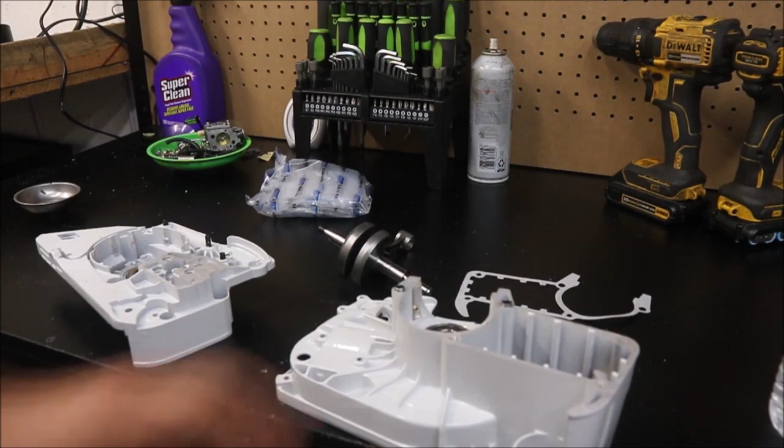Alrighty guys, got the cases laid out. Case gasket. What's funny, that case gasket was by itself in the bottom of the box that the cases were in. Damn near ripped the thing getting it out. I've not seen a muffler gasket or a base gasket anywhere. I'm not real concerned about the base gasket, but hope we got a muffler gasket somewhere.

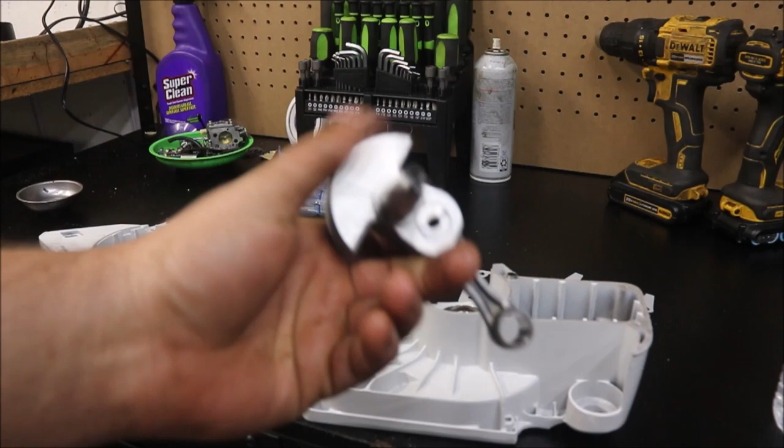But what I wanted to show is the Farmertec cranks have come a long way over the years. I put some of the very first kits they came out with together, going on like 8 years ago or something. They may have been making them before that, I don't know, but I done a 372 kit, and then a year or two later I done a 250 kit. They were both horrible. The quality just was not there yet.

But I'm not gonna bore you guys with the assembly of the cases. There's lots of videos of me assembling cases. If you're a beginner, get yourself a toaster oven. Everybody has a freezer. Or you can use a heat gun. I have a heat gun here. Heat your cases up, freeze your crankshaft, and 9 times out of 10 they'll drop right together, or you can buy pullers and pull it all together.

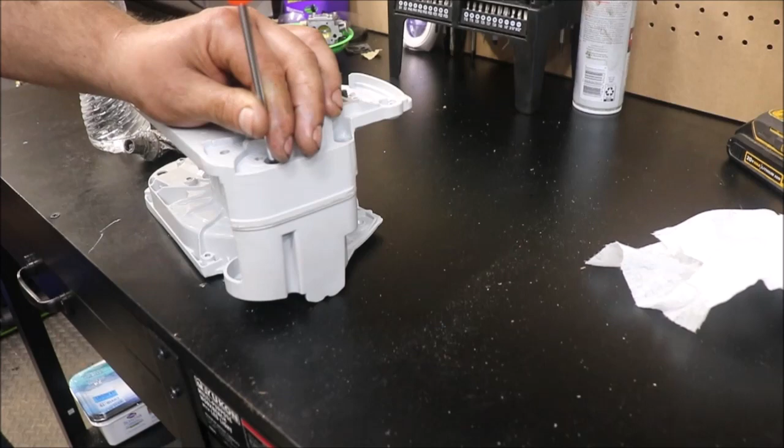And these newer Farmertec bolts are like the Stihl OE bolts. The back side of them has the pattern that works like using a lock washer. Pretty cool.

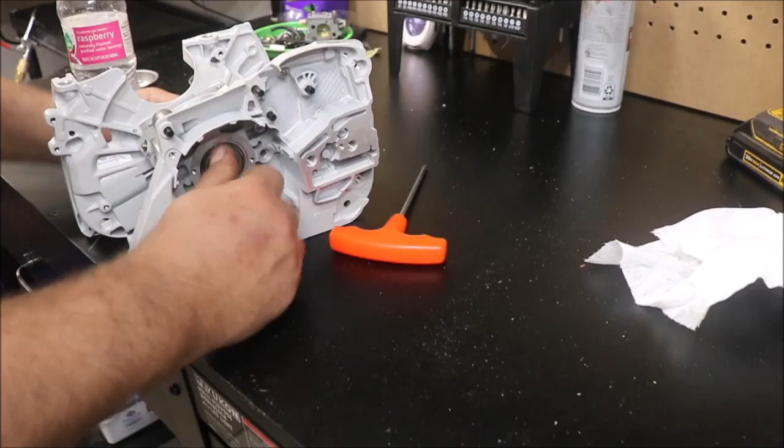Okay, so that's actually spinning really well, and it looks to be lined up really well. You have to remember the crank seals are already in here, so you're not going to get it to just zip around, but there's a little bit of grease out here on the end of that, and I'm able to spin it around. I'm not even going to whack on that one with the hammer. If it's out any little bit, it'll level out as the saw gets warmed up.

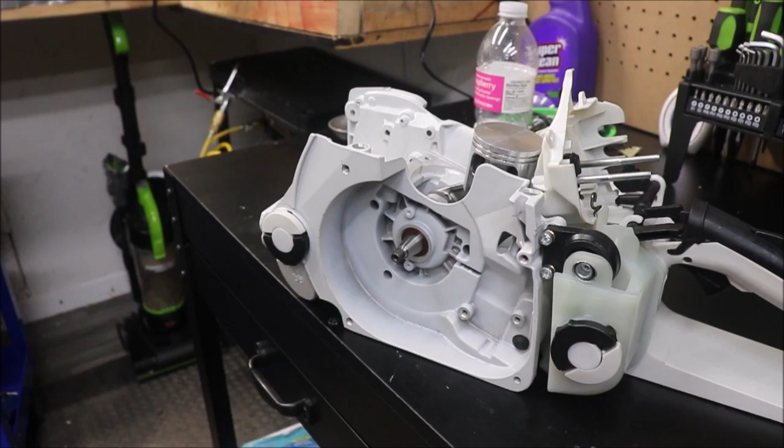But okay guys, first off we've got what appears to be a flat top piston. It is a windowed piston, but what I'm finding odd, which the 200Ts are the same way, and I don't really care for that, this is plainly a case fed setup. Quad port. Squish band in it looks horrible. It's got a big step all around it, and then it steps down. It's like domed, and it just looks horrible. That's going to need more than just a little cleanup.

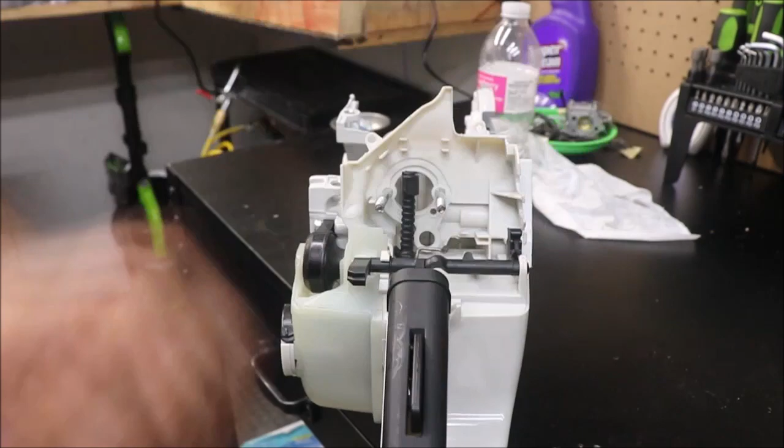The rest of the cylinder's not too bad. Looks to be one of their cheaper line of cylinders. I think my 460 had this same cylinder, like it came from the same manufacturer. But what was weird, the wiring was not with this handle. It was in the box with the coil. I'm gonna have to figure that out. I'm probably gonna have to look at an IPL, honestly, because I don't have another one of these here to look at. But the handle wasn't too bad.

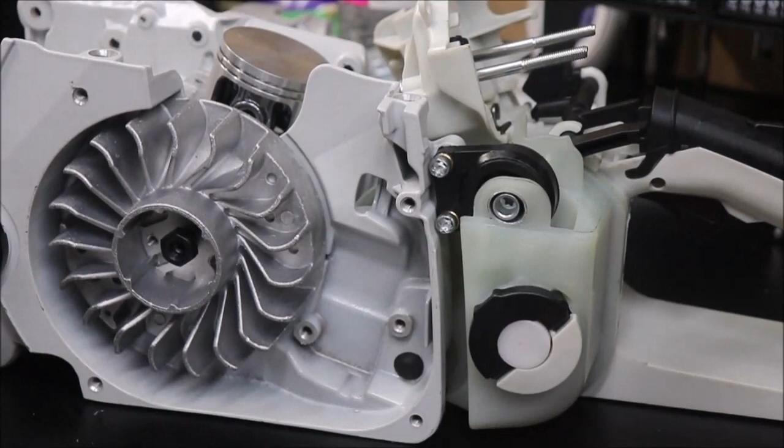There were some bushings that had to be pulled into the cases. It does have a rubber AV mount back here, and of course your springs at the front, and it's got a big spring that's going to go from the handlebar, I'm assuming, over to the cylinder. I've not looked at that. Maybe not. I don't know. We'll figure that out when it comes time for it. But alrighty, guys. This one has enough slop in it to go ahead and get a timing advance, as you can see.

Alright. Now, I'm going to get the cylinder on and see where everything's initially at. Again, that squish band looks like pure garbage. Okay guys, so I'm going to show you every damn little hiccup with this one I can find. First off, I'm kind of aggravated about the wiring not being in the handle, but we can figure that out. It almost looks like there's something missing that I don't have in the kit, but

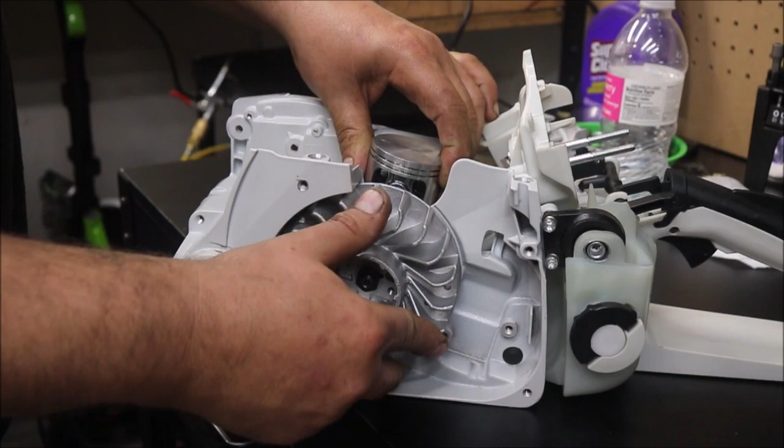I'm about 100% certain that's the crankshaft lobes hitting the inside of the piston or bottom of the piston, because that thing spun smooth as butter before I put the piston on. Let's just see here. This is a 12mm wrist pin setup. Yeah. Smooth as silk.

I honestly think we might be hitting the cases in here too with the crankshaft. Well, maybe when we put the cylinder on it won't be the case, but again, I just want to show you guys every little hiccup. A lot of people buy these kits and then throw a bunch of OEM stuff at it. And I'm just going to tell you, by the time you do that, you probably could have found one of these damn things used somewhere.

I build these a lot of the times just to play with. You can get a good saw out of them, but I have put them together to where there wasn't a hiccup at all, nothing missing at all, but I have done several of them where there were parts missing, wrong parts, or just, it is what it is. It's not an OEM saw and never will be.

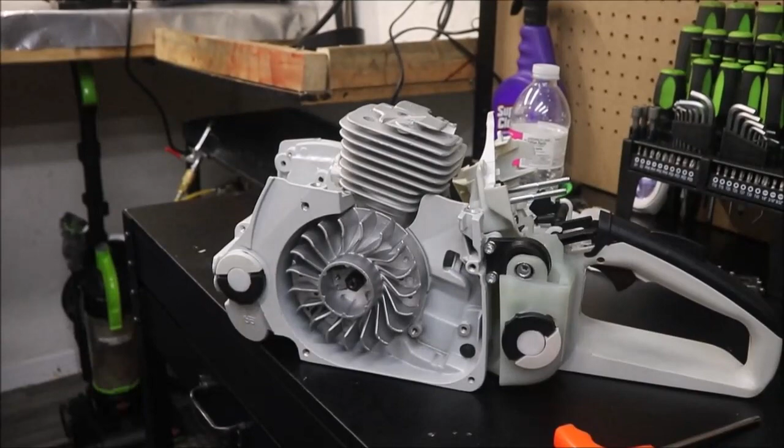This is starting to bind. I've not even put a screw in this. I want to show you guys something. That's at BDC. We'll have to figure that one out. Once I figure out exactly what in the hell's got it, we'll bring you guys back and let you know. Could be as simple as just a case gasket or something, but I highly doubt it.

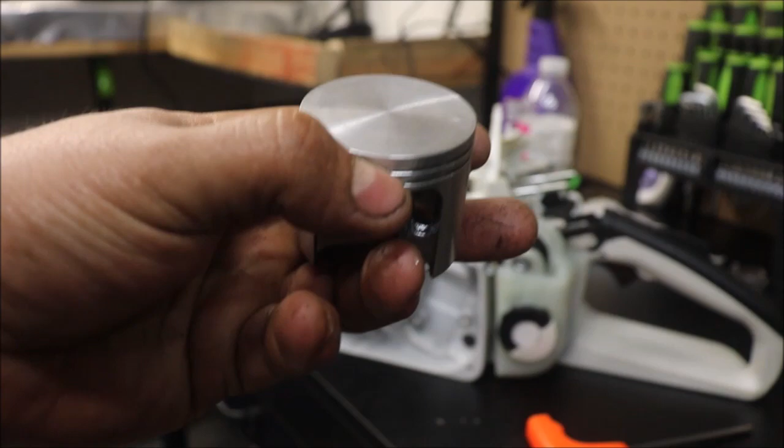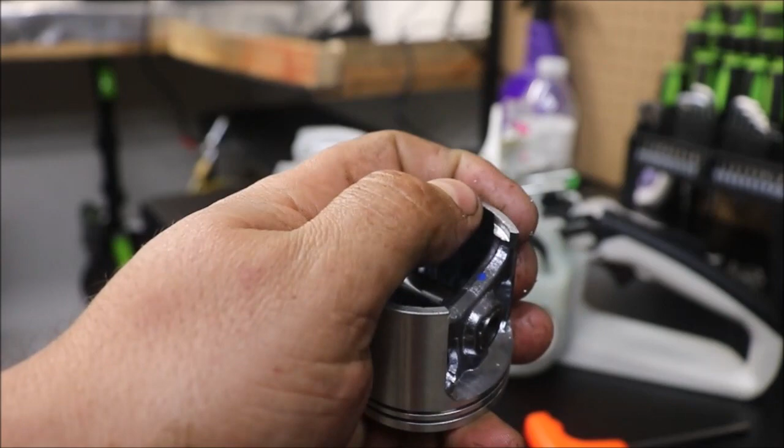I thought that was a flat top at first glance. That thing has the ever most slightly hint of a dome in the center. That's kind of weird, but it is a good looking piston. But I swear I believe we're hitting those supports right here inside. It could even be hitting the skirts. All of it's kind of rough casted, but right here it almost feels like it's been scrubbing and almost looks to be that way. I'm going to go over and clean this up with the die grinder. I guess we're modding the piston first on this one.

So I took just a few minutes with the Dremel and, hitting. Hitting pretty good, really. When I first set the cylinder on, it wasn't that bad, but right there, not half bad. If I had the bolts in it, it probably wouldn't be scuffing as bad, but sure enough the bottom of the piston's hitting the crankshaft. That's kind of really shitty there, but anyway, I'm probably gonna quit on this thing for tonight, I guess. Getting a little late, but I'll add more to this as I get more.

Alrighty guys, success, I think. I ground a lot out of the inside of that piston. That's kind of insane. But again, I wanted to show you guys every little hiccup. I've shown putting some of these together. A lot of them do go together, you know, without many issues, but I honestly think this one's going to end up being a problem solve. I could be wrong, but you do run into them every now and then. But like I said, I think I'm done here tonight.

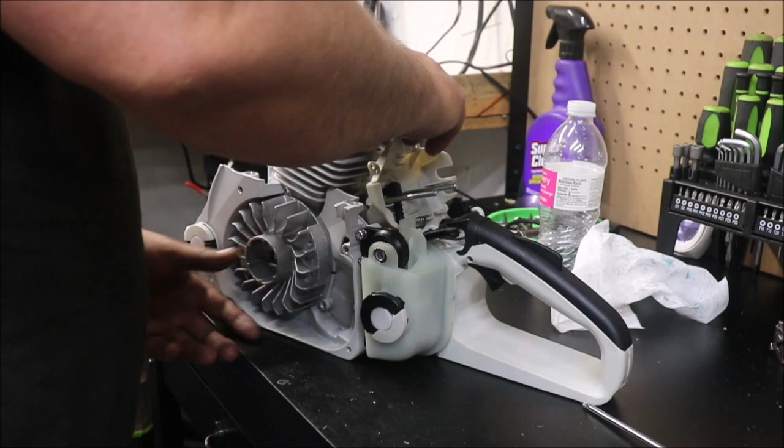The only thing I may do is see if it'll even squish a piece of solder. Let's go with their medium size stuff. Alrighty, we got our solder. This is the medium stuff. I'm just wanting to get an idea and see what's up here with this thing. I've not got high hopes for this top end. Well, it really ain't that bad. That's pretty good mesh on it. Let me get my calipers set up and I'll bring you guys back and let you know what I find.

Alright guys, got 24 thou squish. The next thing I'll probably do, and it will be tomorrow afternoon, but again, I'm going to put this whole video together.

It'll be long. Some people like sitting and watching a long video. I know a lot of people have these builds. I do myself in multi-part series, but I'm just not going to do it. I'm just going to show you everything I do here and any hiccup I run into in one long video.

But 24 thou squish, but I'm going to check and make sure we can even cut that band. I didn't even look to see if there was a death ring. It's late. It's going on midnight. We'll look at all that tomorrow. I'll check our intake timing, see how easy that band cuts, and you know, if we can cut it at all. It'll suck if we can't, but I can make power with it regardless.

We can maybe cut a pop up or something if we have to get a little more pop out of it, but 24 thou, the next thing I'll do is check intake timing and see if we can cut a bunch of material out of that band. But anyway guys, we'll update.

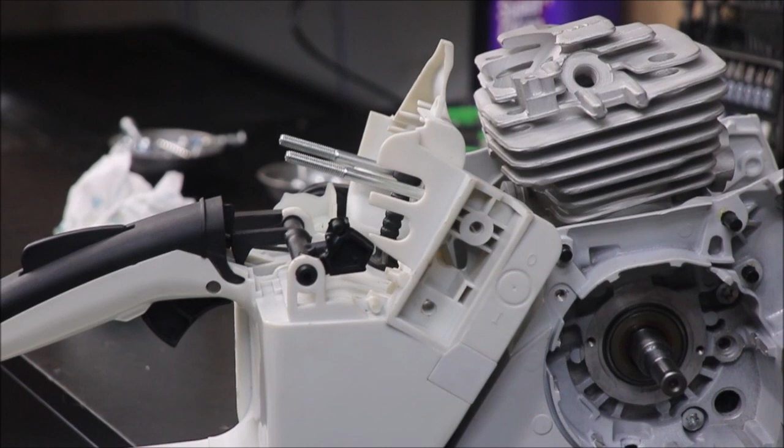Well, thank you Farmertec. After a little bit of homework, we do indeed have a contact spring missing. Yeah, like I said, every other one of these kits you get, there'll be something missing from it. It's just kind of odd that spring. I've searched everywhere, went back through the box, all the bags, even the trash can where I threw the bag away that it came out of.

But after getting so many of these kits and putting them together over the years, some of them I've not even shown here on the channel, it seems like you'll get one every now and then that's got one or two little pieces missing, but I think that thing's like $6-7, so I guess we'll get one ordered and get it on the way. But I think I'm going to go ahead and get into the cylinder work and port work on this thing and see if we can figure some of that mess out.

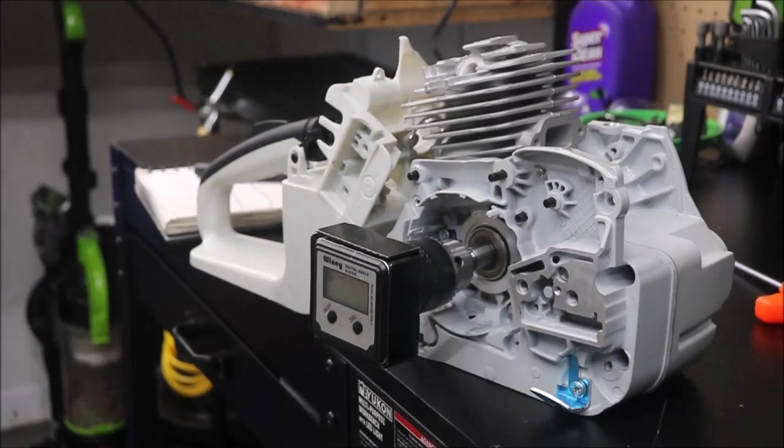Alright guys, pulled the port map on it. We'd done the squish last night, 24 thou, but of course, I showed that combustion chamber and band. It's just one big mess. 105 on the exhaust roof, 129 on the uppers. That seems to be all around from what I checked. Usually you'll have one open before the other, but that was all around on this particular cylinder, and 68 on the intake, which some of that's scared.

I've got it clearanced, but the piston needs put in the lathe, I guess, backwards, and some of the skirt trimmed off anyway. It's clearing the journals on the crankshaft, not lobes, but it can't be by a lot. But anyway, I'll yank this mess off of it and see what we can come up with, if we can even do any machine work. If not, I'm sure we can make it run good with what's there.

From what I've seen, the G3666 or whatever it is, or G366, the blue saw, from what I've seen in other videos, those things make really good power right out of the gate in stock form with minor mods. So we'll just have to see.

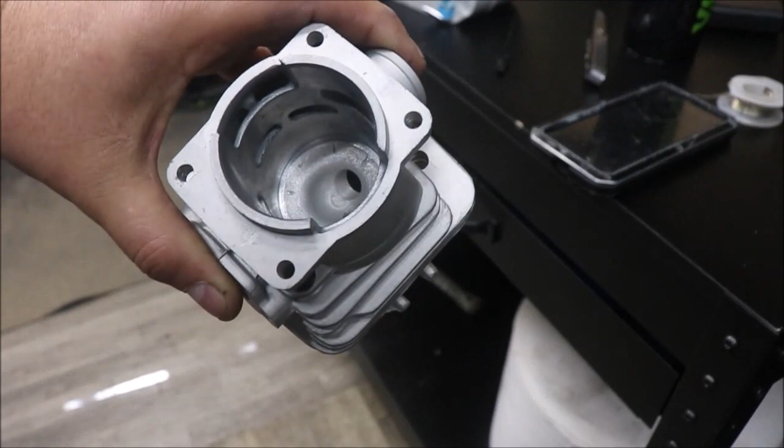Okay guys, so maybe you can see down in there what I'm talking about. I've just made a couple of light passes just to show that outer ring. How thick that is, I don't know. I think we're looking at least 25-30 thousandths, maybe more, but there is a lot of material to work with. I think we can at least get that cut out and get the band to where it doesn't have that step and is just one slope across, or one plane across. But that's the task for today, I guess.

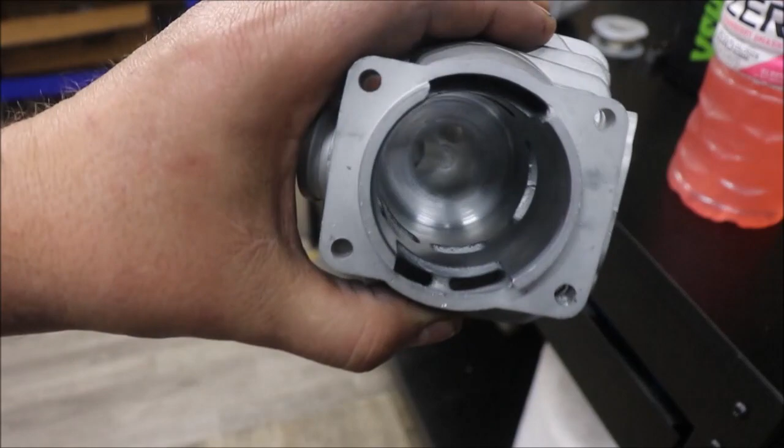Alrighty guys, that is a lot more presentable. We can make some horsepower with that. If you refer back to how ugly that thing looked before, it is a night and day difference. So the next thing I've got to do is figure out exactly how much we cut out. I didn't measure. I was just cutting till the band looks good and presentable. There were little lines and nubs all down it. I don't know if the camera picked that up before, and then we had that step that went all the way around the cylinder lining.

It's pretty thick itself, probably 25-30 thousandths, so I'm going to guess we took 40 thousandths plus out of this to get it looking the way it is. But once I get it on and we pull a squish reading again, I'll bring you guys back and let you know exactly how much I cut out, because inquiring minds are going to want to know.

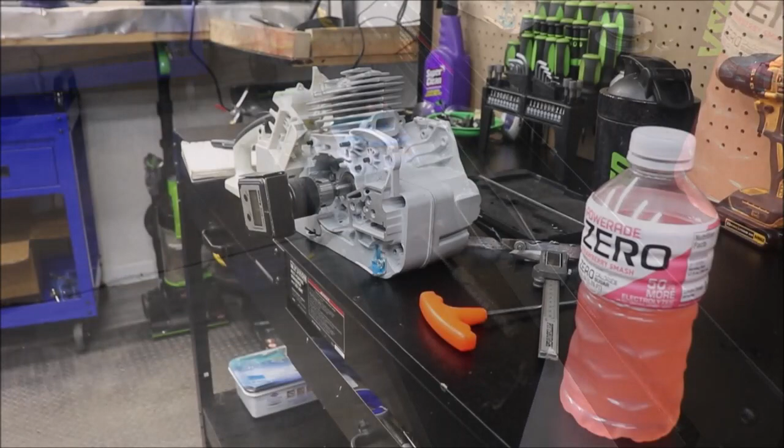Okay guys, it's looking like we pulled like 45, 46 thou out. We're setting like 69, 70 thousandths squish now, so it's looking like we need to pull 40, 45 thousandths back off of the base. That's just the name of the game.

Would it have ran the way it was? It would have ran. I could have worked with those timing numbers, could have made it run pretty good, but we want it to run real good. But with that said, I'm going to get this thing set up, start cutting the base, and bring you guys back when we're ready to start getting into the rest of the port work on this thing.

Alright guys, there's where we're at after the machine work. I've got squish about back where it was at. Take note that band does have a taper. So the squish gets looser as it goes up toward the chamber, if that makes sense to you. It's not like it's 24 thou completely across. Anyway,

moved things 4.5 degrees or so. 109 on the exhaust roof, 133 on the uppers, and 71 on the intake. What are we going to do with those numbers? I'm going to throw numbers at it that I know works if I can move the uppers far enough.

I'd like to have the exhaust roof somewhere 104, 105-ish. Transfers 124, 125-ish. If I can raise them a little higher, it'd be cool. And get the intake somewhere between 77, 80 degrees, somewhere in that area. But anyway,

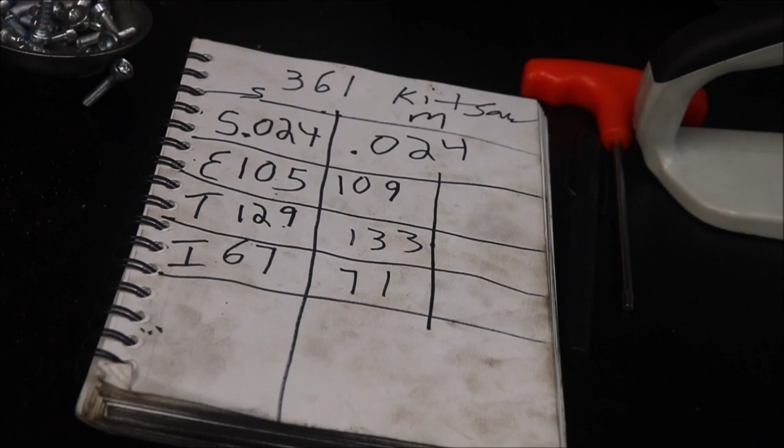I hate to make multiple parts to this, but let me pull the cylinder off. Alright guys, hopefully you can see the squish band. Turned out pretty good. Base got a good nice finish on it.

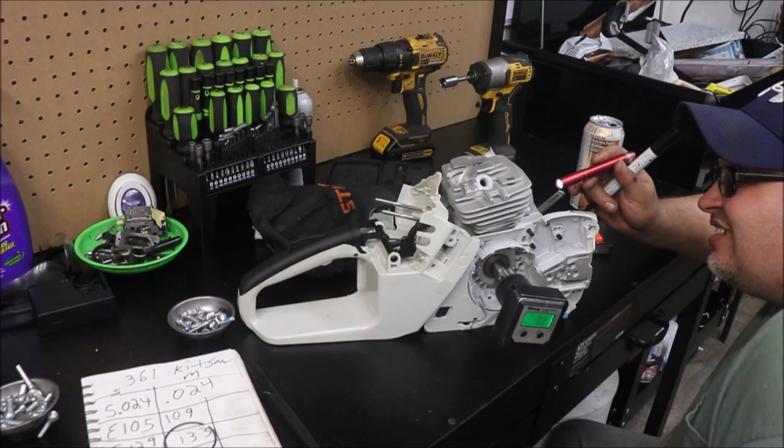It's kind of hard to get it this dead on, but first off, I want to make sure there's no free port. I know that's going to be about impossible because of how long the skirts are of that piston, and even after we got it to clear the other night, I still had to modify the piston some last night after lowering the cylinder to get it to clear the crankshaft. A lot of it ended up being the tie straps on the piston, or where the window's at, and where the wrist pin bosses are at.

I don't know if that's going to fit in there. It's not looking like it's going to. Well, that kind of sucks. I don't really want to mark a line on it with a scribe. Maybe that one will go in. I just want to see how much I can pull off of the bottom of that piston. And maybe we can get some marks out on the side. Maybe figure out how wide the port is exactly. It doesn't look very wide. It looks like there's a lot of room to work with.

Alright guys, as you can see, we have plenty enough wiggle room to about do what we want to do. What I want to do to further clearance this piston, so I've got a little bit of peace of mind, and it'll actually lighten the piston, I want to pull the rest of my intake timing off of the bottom of the piston. I'm probably going to take 30-40 thou off, come back, check intake timing, see where that lands us if we get in the area that I want it to be.

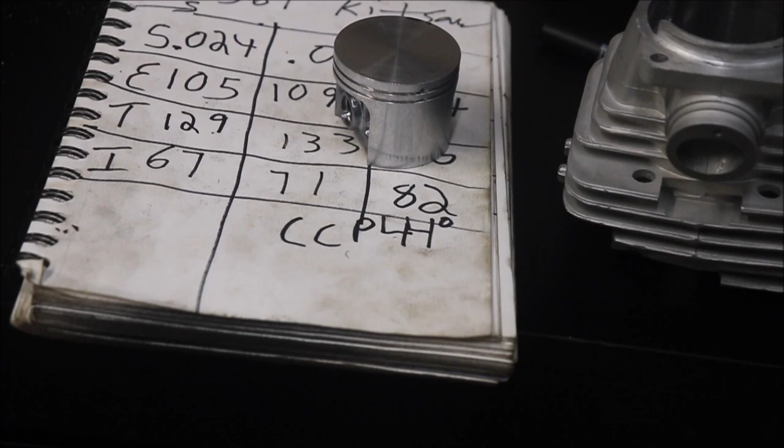I really don't remember, it's been too long ago, but I'll move the piston if you can read that. If not, we ended up 24 thou squish in the tightest part of the band. Band is on a taper. I think I went over that already. You can either agree with that or not. I've done it both ways. I've cut bands flat across, big wide bands. I've cut them to where they're on a taper. Both make power, but I decided to go that route on this because the chamber and band and everything was already on a pretty steep slope once it got past that step in the band anyway.

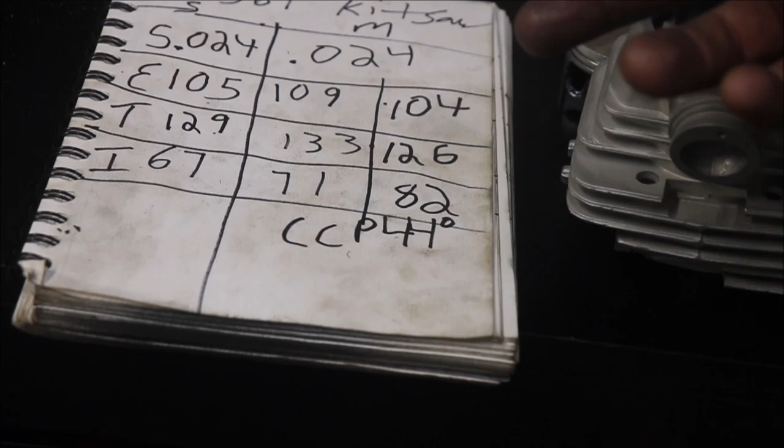But 24 thou, 104 on the exhaust roof, 126 on the uppers. That's all around. The intake I kind of overshot on the piston. It'd be easily corrected with another piston if the saw has poor idle quality or spit back or something. But that last number is crankcase pressure. You measure that in degrees. It's 44 degrees. It's the point from when your uppers shut and your intake opens, or vice versa, however you want to measure it. It matters. It plays a pretty good role in things. If you don't have enough case pressure, your saw just ain't gonna rev out.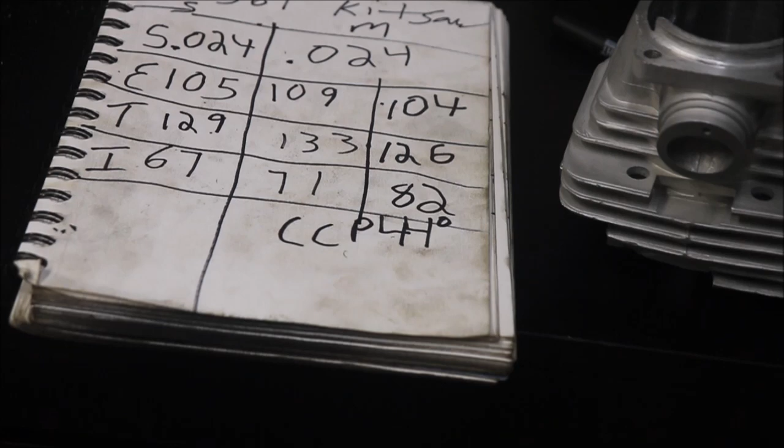With that windowed piston, it being case fed, I guess they've done that to save on weight. This piston, still, with what I've cut out of it and took off of it, you can see you got a really nice finish on that. I am going to work this piston over some more before it goes on the saw, mainly get everything good and smooth, no sharp edges. Maybe try to lighten the pin a little more. The pin feels like it's a little lighter than a Husky 12mm pin.

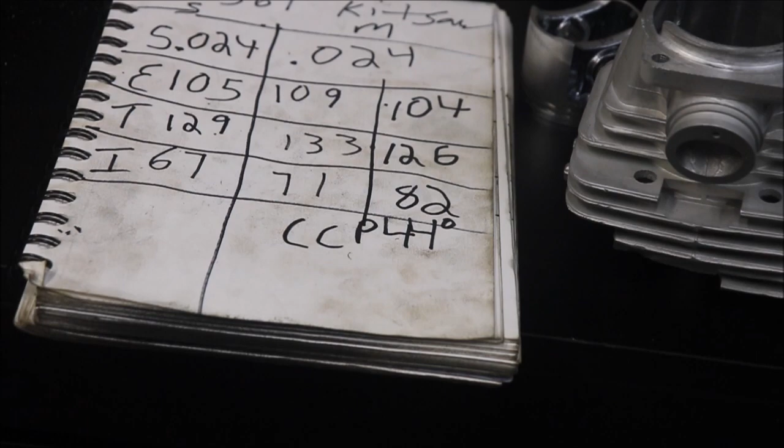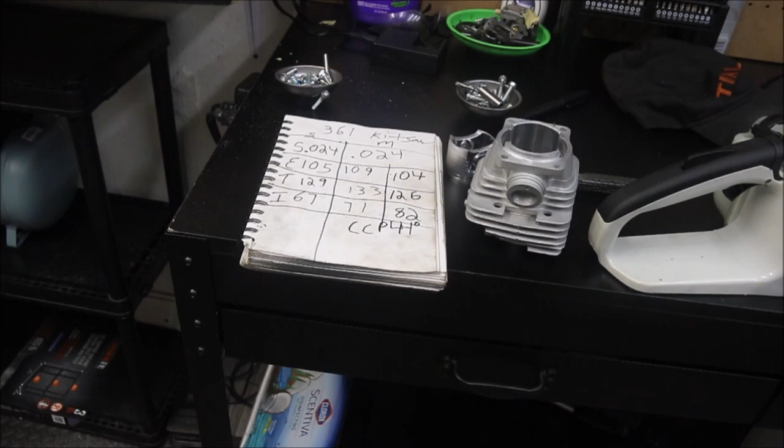Seemed like one of you guys had mentioned that to me in another video when we were doing the 357 and 359 project, or whatever we want to call it, the hot saw. That thing feels like it's gonna be nasty, but who knows? They can fool you. There's a video on that if you're new to the channel. It should be just a few back before this, but I'm waiting on a clutch for that. The clutch I got was that little clutch with two springs in it, like a 350 or 346 or 455 uses. It was wrong when it come out of the box. It's got a fine thread pitch. The 359, 357 clutch is a coarse thread pitch, if you don't know that.

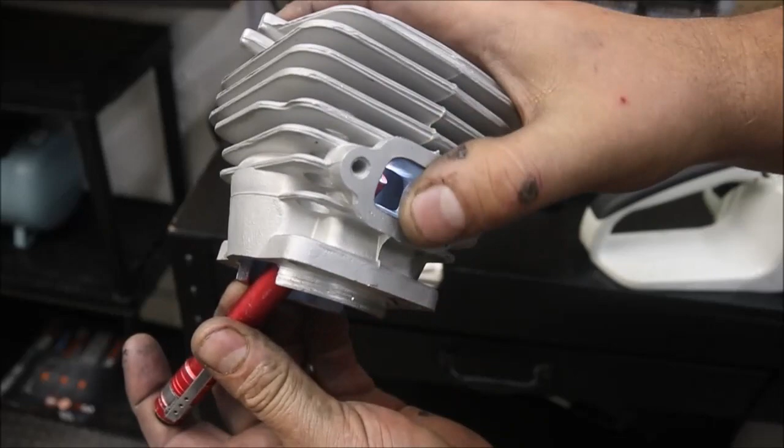But port work on this turned out pretty dang decent, really. They say you can't make chicken pie out of chicken. You guys know how that goes, but let me reposition all of this and see if I can get you guys a better look at this. I should have really got out a video light, but whatever. Didn't really go crazy with that, but it's pretty slick. You can make these things look pretty nice, but you only need to get them so slick to where your mix carbon won't stick to them. And yes, polishing does prevent that.

Justin sent me a picture a while back of his 660, how things still looked. We had that saw here a while back, and the saw's done a lot of work and still looks pretty good. Uppers, cylinder actually ground pretty good and turned out pretty good. Let me get the light down on things.

I've been out here a while, a little longer than I care to mention. Whatever. Messing with this. Talking on the phone. I went with Dad this morning. We cut some trees.

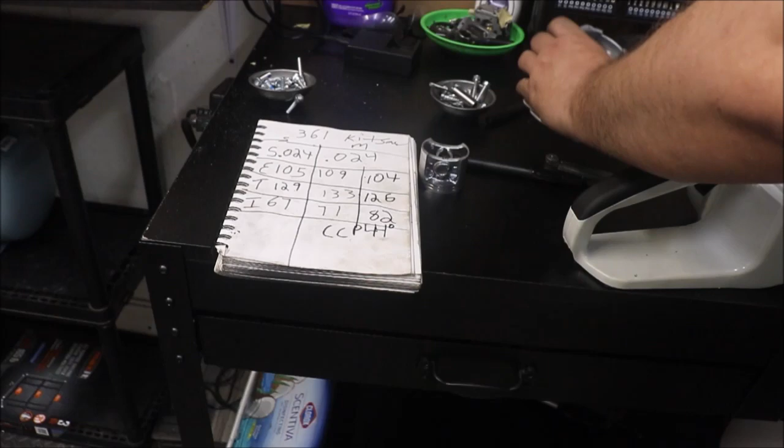I think I've shown how I do my intakes. A lot of other guys do something similar. I ain't gonna really call it a lung or whatever. It is what it is. I've got my own way I like to do things, and I've kind of always done them that way. Anyway, guys,